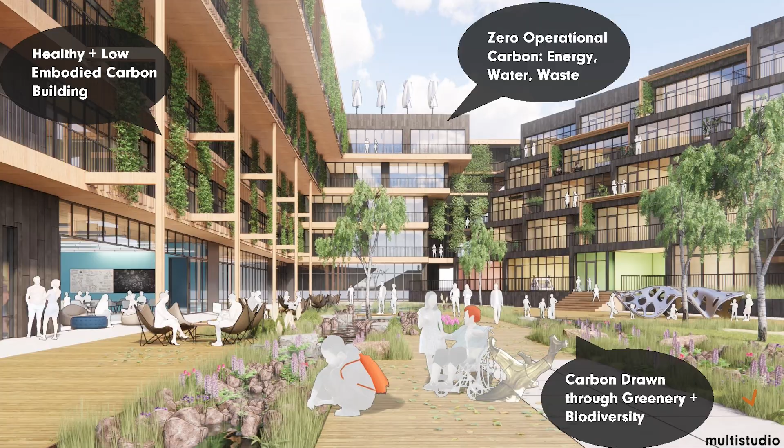So climate positive design is really just a holistic approach to think about how we build, how we design to promote social equity, economic mobility, and climate justice through this idea of decarbonization, design, and implementation. It's not complicated, we just have to think holistically. So first, we talk about energy and water efficiency. It's always good to reduce, reuse, and then renewable.

So I always say let's prioritize passive design strategies first. Let's invest more in the building envelope because it lasts much longer. It lasts 50 to 100 years, a longer lifespan compared to active building systems, such as MEP systems that only last about 15 to 20 years. And then once you can really lower that energy or water consumption, we look for a way to offset it with renewables, such as solar, which is much cheaper now too.

Second is to design with healthy and low embodied carbon materials, which is what we're really going to focus on today. This is much like eating smart, right? We've been talking about trying to eat fresh produce, locally produced, that might be produced by your local regenerative agriculture farmer, and minimizing the intake of processed, packaged food. So it's the same concept.

We really want to build with bio-based materials such as mass timber, which is inherently produced with less energy and water and fewer of those toxic chemicals that we don't want. We also should aim to design with less rather than more when it's possible, so you really reduce that building material quantity.

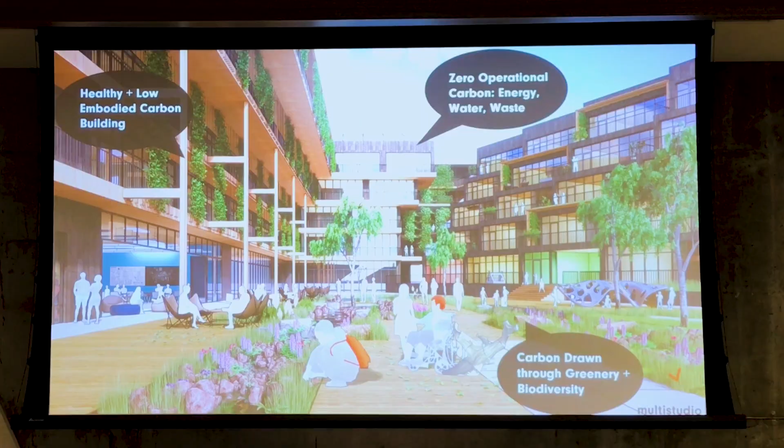So when we design and build with this combination of authentic design strategies, people will actually experience it, right? When you walk into a well-insulated housing unit, you can feel the calmness, it's quieter, it's well-crafted. When you go to a biophilic office, like one being presented, people feel happier and much more productive because of the light and air and the tactile experience. And obviously your public plaza, your public spaces will be full of biodiversity and people, and that's where you make your district very vibrant.

So I just want us to think about that when we build buildings with all this strategy. We're really enticing people with this sense of joy because they cohabit with it. So let's talk about the simple and practical low embodied carbon design strategies. You've all heard about 11% of our carbon emissions being dominated by the energy that goes into creating building materials.

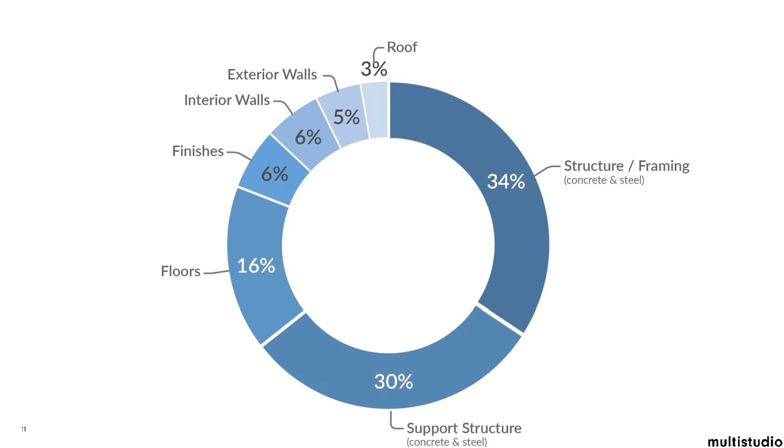So here is a sample building embodied carbon donut chart that shows how embodied carbon goes to different components of the building. You can see the structure usually takes up more than half of the entire building's embodied carbon.

And embodied carbon design really requires a whole team's commitment and evaluation. We usually want to prioritize retrofit first, right? The greenest building is a building that's already built. We want to use low embodied carbon materials such as low embodied concrete, steel, and mass timber. We want to maximize structural efficiency so that the building is lighter. As we talked about earlier, you want a lighter building so you can have a lighter foundation. And we want to build more with less.

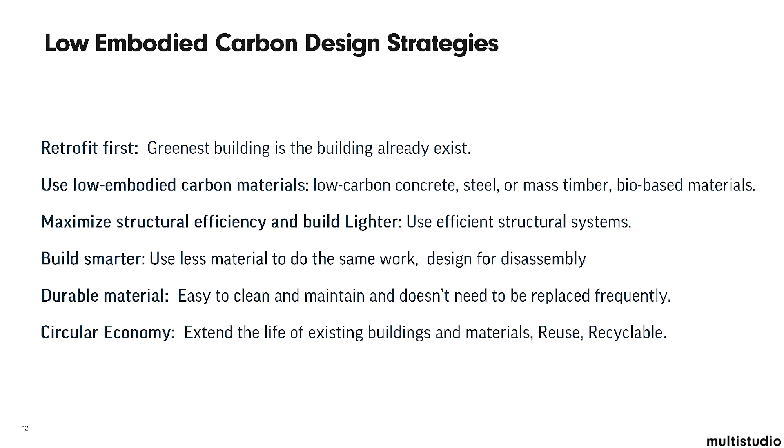The good thing about mass timber and some other building materials is that if you put them in well, you don't need another layer of ceiling to cover them up, which also adds to the embodied carbon. We talked about components of the building being able to disassemble, so that the material can be repurposed and reused instead of going to landfill.

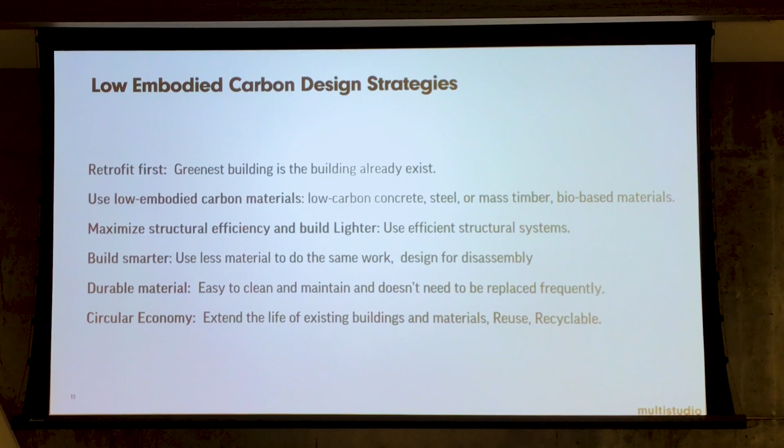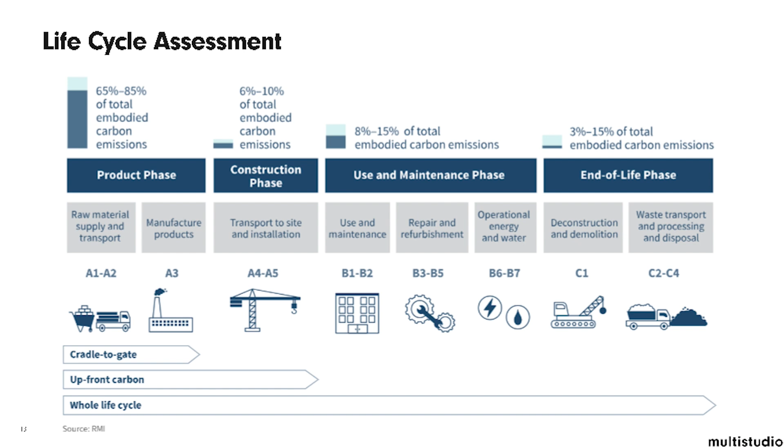We cannot improve if we don't measure, right? And we've learned that over the years. So life cycle assessment is really pushing us to think about the whole life cycle of the building material and be able to quantify it. The good thing is, with policy mandates, advocacy, and market demand, more and more EPDs are out there now, at least from cradle to gate. They always specify the global warming potential. And a few manufacturers are actually providing product-specific or factory-specific EPDs as well, where they have multiple lines and multiple manufacturers.

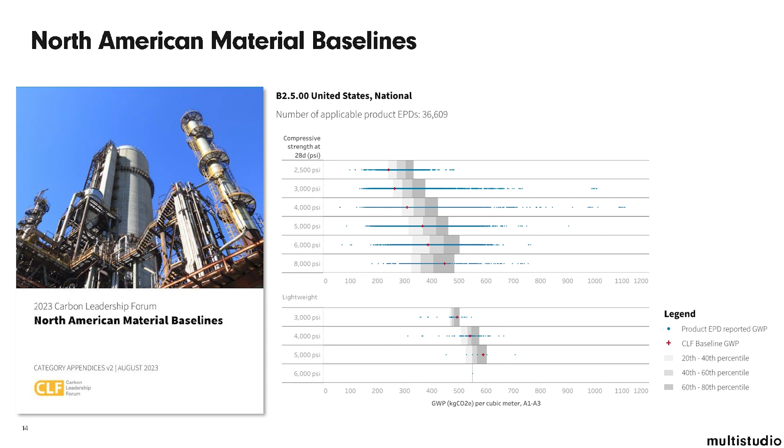Based on analysis of 36,600 product EPDs, the Carbon Leadership Forum published this booklet called North American Material Baseline, August 2023. It has been serving as a reference guide for our industry. On the graph on the right side, you see all these light blue dots spread along the range of global warming potential, and then a little red cross in the middle. That's the so-called baseline. It helps us compare all the different product EPDs coming in, and we're looking for products that have lower GWP compared to that baseline.

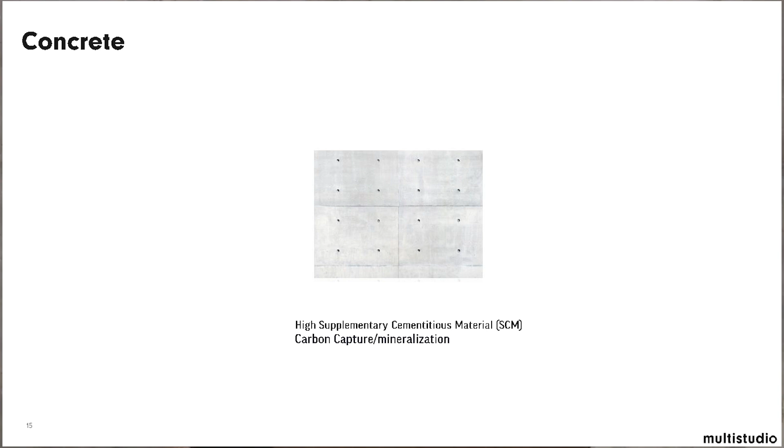So let's look at how we specify low embodied carbon concrete. Every project, no matter if you build with steel, mass timber, or concrete, always has that concrete foundation. That's why it's important. Foundations and vertical concrete components are easier for pursuing low embodied carbon because you're not fighting the curing time on the critical construction schedule. So what we can all do is ask our structural engineer to specify a high SCM mix, substituting with fly ash, slag, pozzolans, all those different kinds of substitute materials.

I think the crucial thing, and we also have a contractor here, and I think a concrete cement supplier as well, is to get them to talk to each other early. Bring them on board early. Try to find a cost-neutral way to maximize the reduction for your entire structure. I think that's a healthier way to find the best solution for your project.

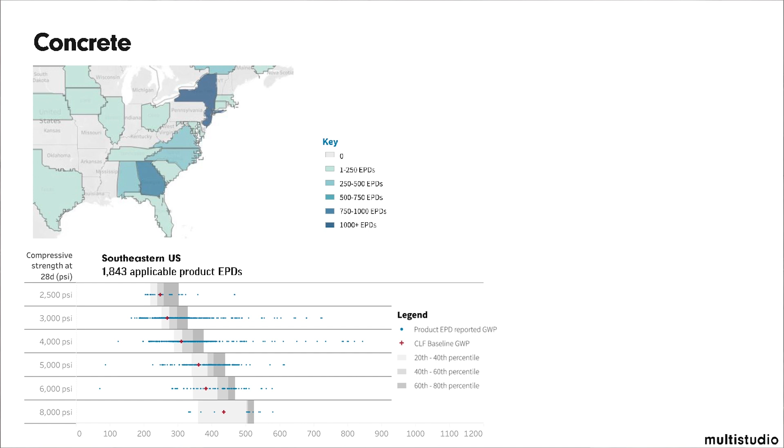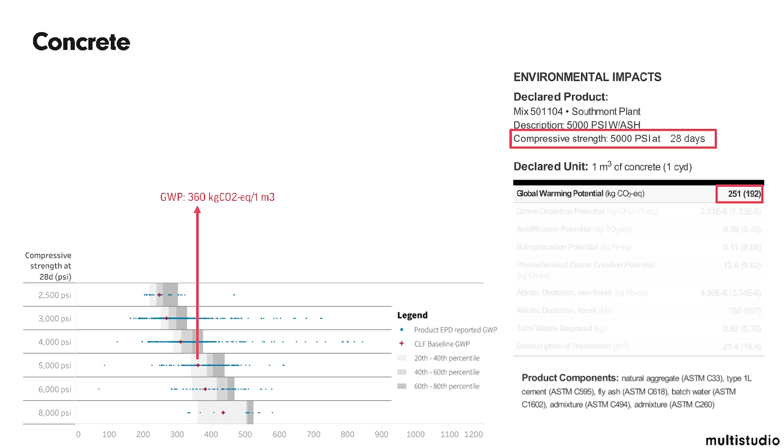Looking at the material baseline, they gathered about 1,843 applicable EPDs just within the Southeast region and categorized them by final compressive strength at 28 days. Compared to that map, you can see there are quite a few concrete plants around Atlanta. For example, the average for 5,000 PSI concrete is 360 kilograms CO2 equivalent. The sample EPD to the right shows that in Alabama, one plant produces concrete for that specification at 251. So this is pretty encouraging, right? It's readily available. You just have to ask and look.

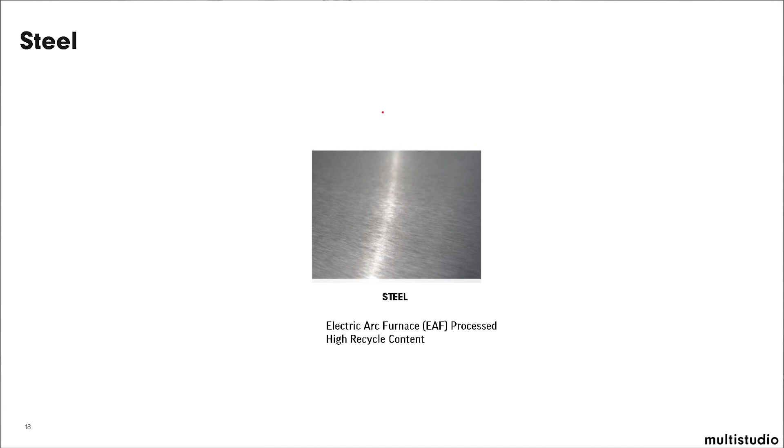And let's take a look at low embodied carbon steel as well. The first rule is to specify steel made in an electric arc furnace. We call it EAF. The EAF process is steelmaking with electricity to melt scrap metal into molten steel. It significantly reduces steel's embodied carbon.

Good thing is 70% of our steel plants in America are using EAF technology. So again, ask for high recycled content, and that's pretty typical practice as well because steel is scarce. Most of them do that. So let's look at the number and the map.

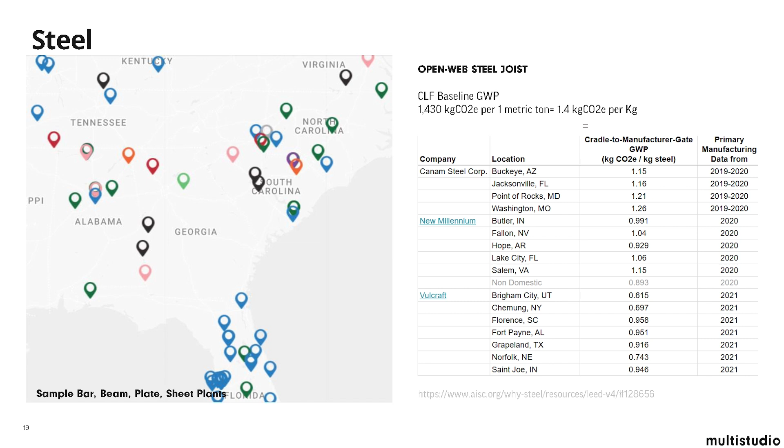The map on the left shows the various steel bar, beam, plate, sheet, EAF plants all sprinkled around the Southeast region. And you can kind of see that, according to the material baseline, the average open web steel joist is 1.4 kilograms. And then you can see from the published list by AISC, most of the open web steel from various different plants are all below that. Some of them actually achieve 50% reduction from the baseline. So this is very encouraging.

Well, I want to say that the EPDs published for glazing, cladding, carpet, flooring, by now there's tons of them. And if more people demand it, the market is shifting that way. There's just going to be more EPDs available, just like the food nutrition label that we see on our food now.

All right, so to achieve low embodied carbon really requires close collaboration with everybody involved. There will be the developer, design team, contractor, everybody, the supply chain all have to get there. It's good to get literate, just like all of you being here. Some people have been working on this 15 years, some people less, but we can all work together, contribute our perspective and our resources to make it happen.

So I'm going to show you a case study of a project that we're currently working on, how we set the baseline, how we try to aim for the sky. One of the projects we're working on right now is a high-rise housing development. I'm going to focus more on housing because that's what I heard was going to happen in Buckhead. It's 500-unit housing with 10% inclusionary housing, sort of middle-income housing. While the owner, developer, and the local jurisdiction don't really mandate low embodied carbon, our design team has been working hard and thinking about all the different factors.

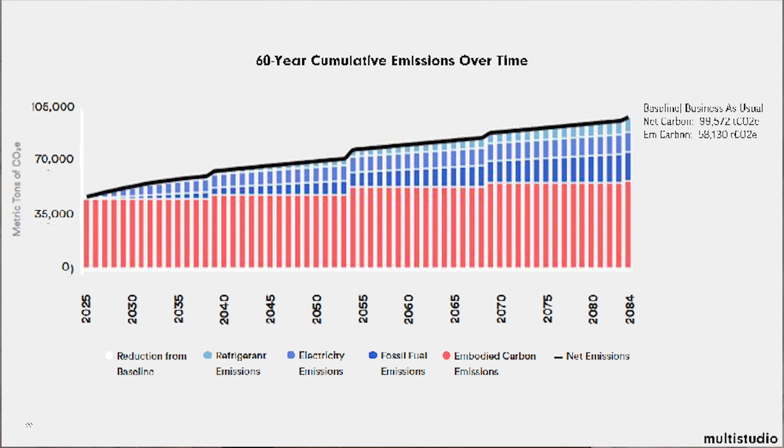To set the baseline and devise reduction strategies, we use an open platform, a free online tool that you can have access to. It's called C-Scale. It allows us to just type in zip code, project size, typology, a few parameters. It will help us set a project-specific baseline, which is what you see on the slide. I want to point out a few things.

You can see that the amount of embodied carbon we use on day one when the building opens is more than the combined operating carbon over the life of 60 years, right? And the operating carbon is our electricity, fossil fuel, refrigerant that really keep the building running. And you can see that the red color, the embodied carbon, tends to go up a little bit every so often. That's just because the materials and building systems have to be replaced or maintained every so often. So you kind of see jumps at 15 or 30 years.

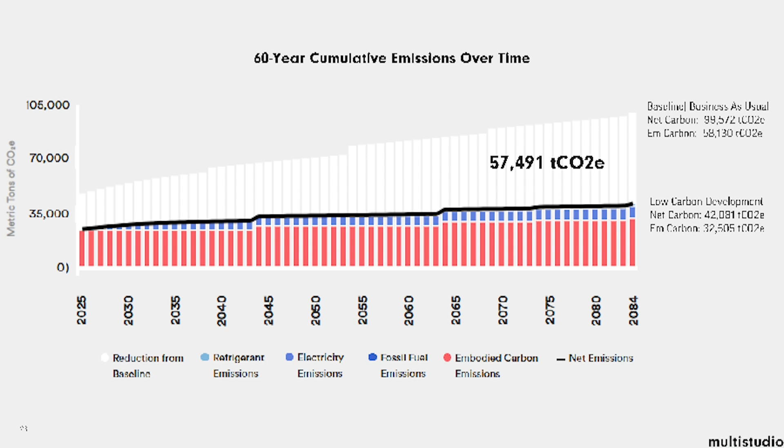But if we were to elect all the aggressive low embodied carbon strategies and climate positive design strategies, by going all electric and all low embodied carbon refrigerant, building material and systems, you can see that over the lifespan of 60 years, we could actually reduce more than 50% if we're really aggressive, right? This is what we're going to try, to see how we can shoot for the sky.

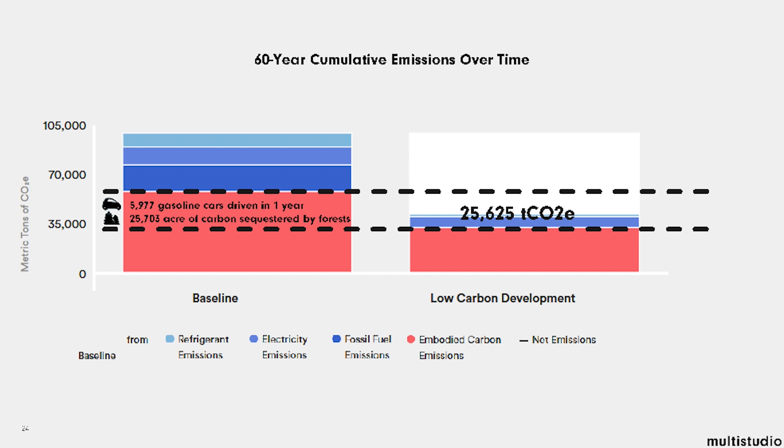And then the difference in embodied carbon reduction alone could be about 25,000 tons of CO2 equivalent. To put that in perspective, this is equal to taking 6,000 gasoline cars off the road, or about the amount of carbon sequestered by 25,700 acres of US forest, right? This is huge, so why don't we try it, if we can make it happen.

Like the simple donut chart I showed you earlier, I also want to point out that the structural elements make up 50% of the total embodied carbon in modules A1 to A3, so that's cradle to gate. This is the carbon that's spent on just producing the material. Interior material, the orange part, actually ranks second, and then building systems and the cladding. Interior material makes up a bit of embodied carbon because there's 500 units, there's a lot of gypsum, casework, flooring, finishes that go into it. So it does add up even just thinking interior-wise.

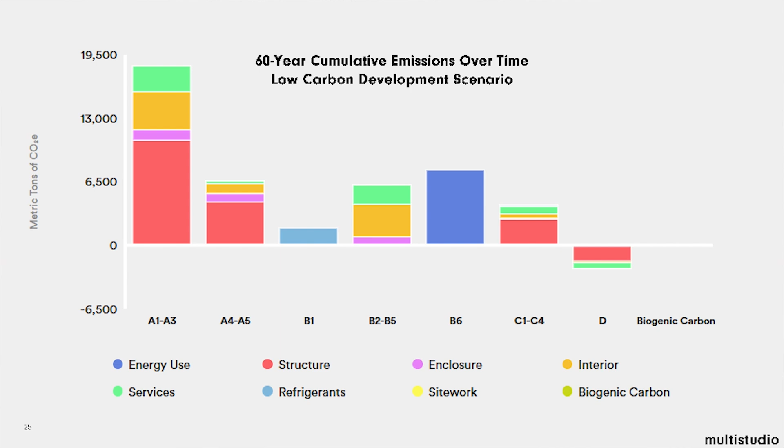We should know that the energy spent on maintenance and replacement of material over 60 years adds up quite a bit too. That's B2 to B5. It's not as high as the operating energy, but it's there. So that's why durability of your finishes is also important.

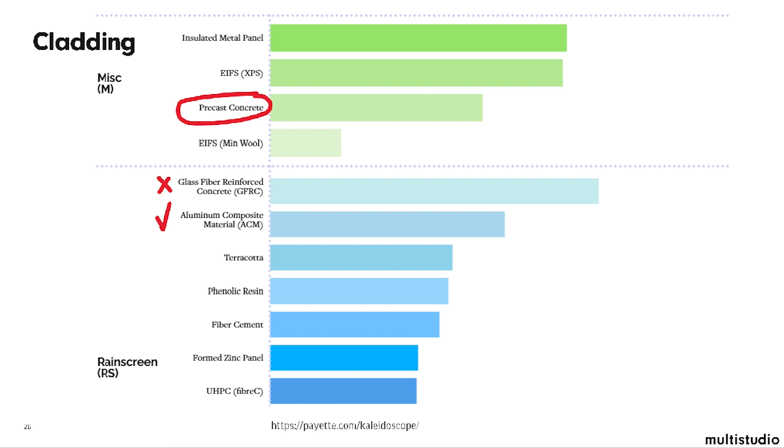You want to be able to not have to replace material often. So obviously, as an architect design team, we were so excited. We were like, hey, let's make this all possible. We started looking at cladding material, thinking about how can we choose a responsible embodied carbon cladding. So we looked through different options, generic options that have been published on other website resources. We thought the precast concrete seems to be aligned to our concept design of the scallop fluted concrete facade articulation that we wanted, but still quite low in terms of GWP compared to other materials.

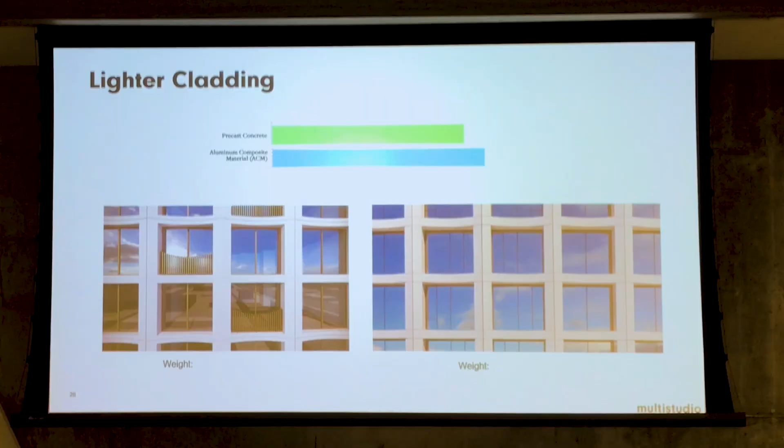Then we went on designing, but then at the end of SD, the structural analysis and cost estimate told us that although the precast concrete cladding has less GWP, it's heavy. It's putting quite a bit of burden on our structural system. And when we ran more analysis, the structural engineer estimated that by switching to a lighter cladding, such as aluminum composite panel, and just fine-tuning the core geometry compared to the overall building geometry, we could actually reduce 10% of cement being used in this building. And that definitely contributes to cost saving as well, right? So it's sort of the VE of the embodied carbon and VE of the construction cost as well.

So the lesson learned is that communication is key to incorporate all the disciplines. We can't really all work in silos. We really have to have constant communication and work closely to evaluate the big picture early. So we're lucky we're still in a very early design strategy stage. Right now, our structural engineer is finalizing the structure calc and embodied carbon estimate while we work really closely with the interior team to make sure that we all select low embodied carbon and healthy materials that are durable, so that we can continue to maximize our embodied carbon reduction according to the goal that we set.

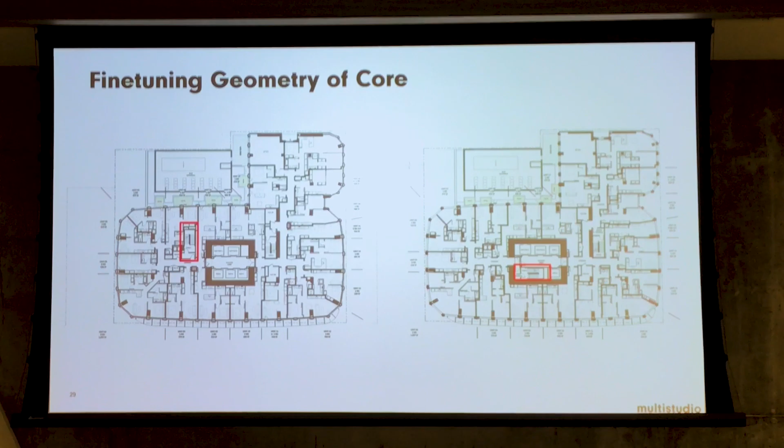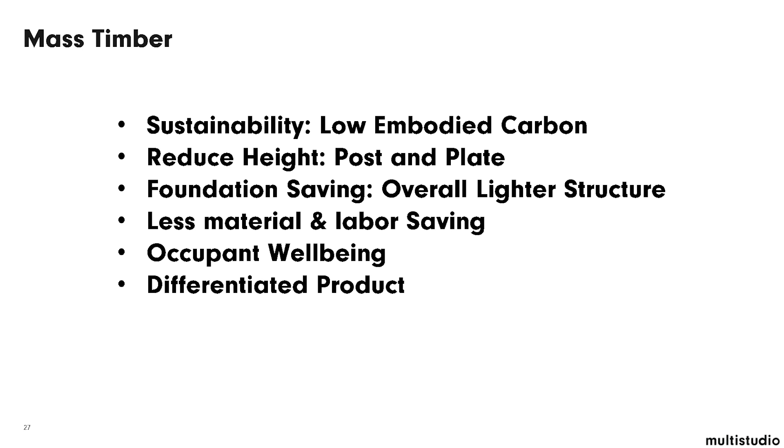I know we covered mass timber earlier, so I don't have to dwell too much on this. But the cool thing about mass timber is that it's something that people could experience, something people could see, right? Like if you talk about low embodied carbon concrete, most people walk into the building before they actually experience it. And I want to point out that there's another manufacturer now, just 2 hours away from here in Greenville, South Carolina, using the region's Southern Yellow Pine. So this is sort of an opportunity for you all to capture.

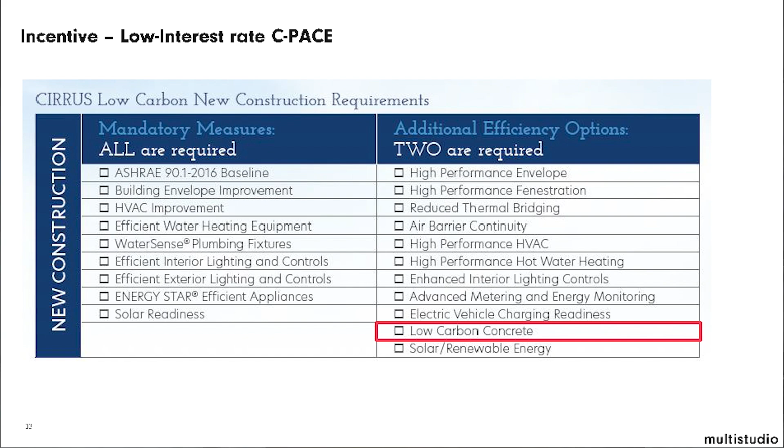Earlier, we talked about incentives. I understand there's no more incentive in the FAR, in the zoning, but I want to point out that there are financial incentives out there right now based on the commercial PACE product. There are products out there that lend lower interest rate loans when the building demonstrates both energy and water savings, and they also allow you to use low carbon concrete as a way to meet their criteria.

My last bit of call to action is that when developers select architects, or when architects select our consultants, we really please go with the professionals who have pledged to make net zero carbon development and have been making progress. I know landscape architects are working on their program, and I really hope that contractors and developers will also pledge on this mission and goal, because it really takes all of that to make a low embodied carbon development happen.